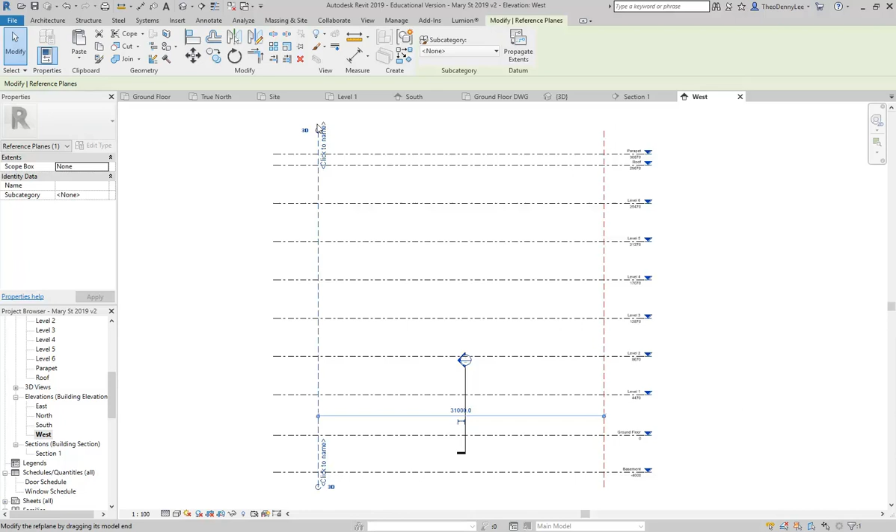So I've got my west elevation still open, just to remind you that I've extended the reference planes to stretch through all of these levels, for a good reason. I'm just going to change one of them so you can see why. So I've brought this one back down, just so you can see. You don't need to do this, I'm just showing you why I made you do it.

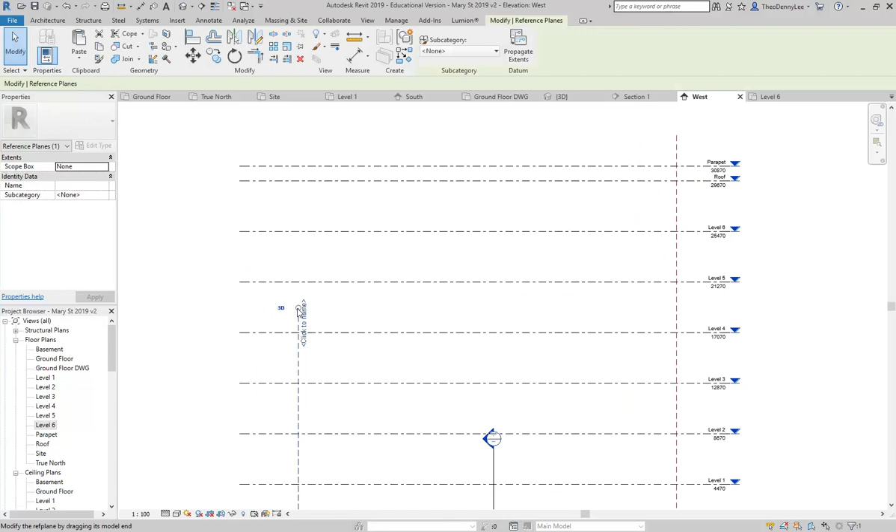So if I go back to one of these upper levels, here you can see this is level 6. I'm going to open up my level 6 floor plan and notice how that reference plane's missing, because it doesn't extend through those levels. So again, if I bring it back to the way I had it, stretched so it crosses over those levels, now if I go to level 6, there it is again.

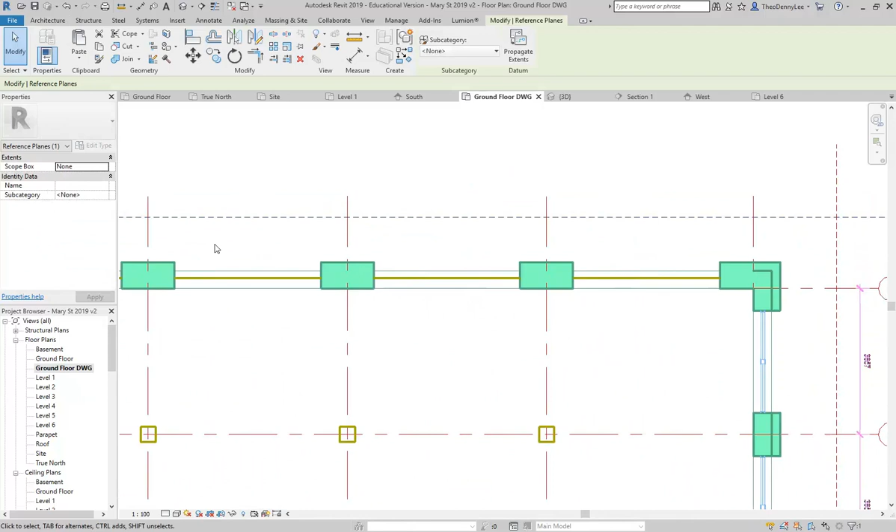So then to make it maybe the right size, now that we know the size of the building because we've inserted the AutoCAD file, you could, if you want to - you don't have to do this, but it's not a bad idea - move that reference plane so it sits on the edge of the AutoCAD lines. Don't be too fussy about the exact position, because you're not really going to use this for your measurements anyway. This is just for a visual reference.

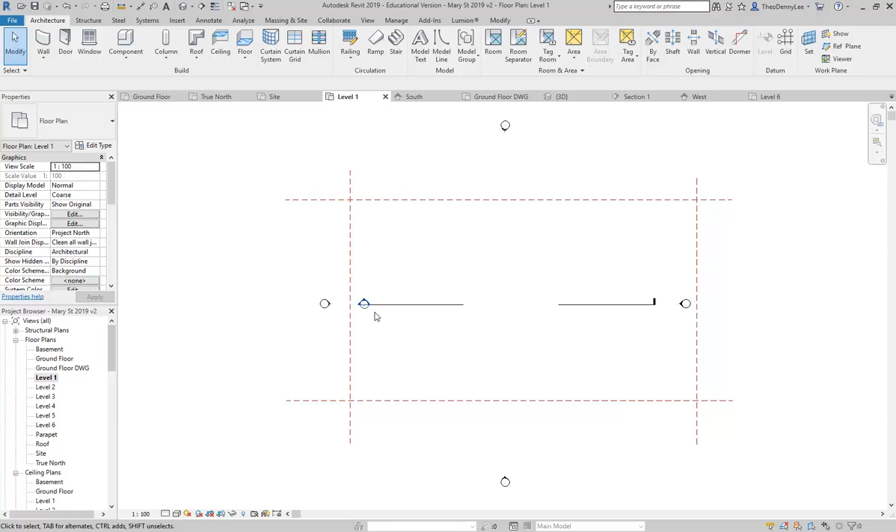Okay, so there we are. And so that way, when I'm looking in the other floor plan views or my elevations, like I was just showing you, I know those reference planes show me roughly how big the building is. As I was saying, it's always a good idea to have those levels go out past the building, especially later when you've got the walls and other things - you don't want the levels sitting over the top.

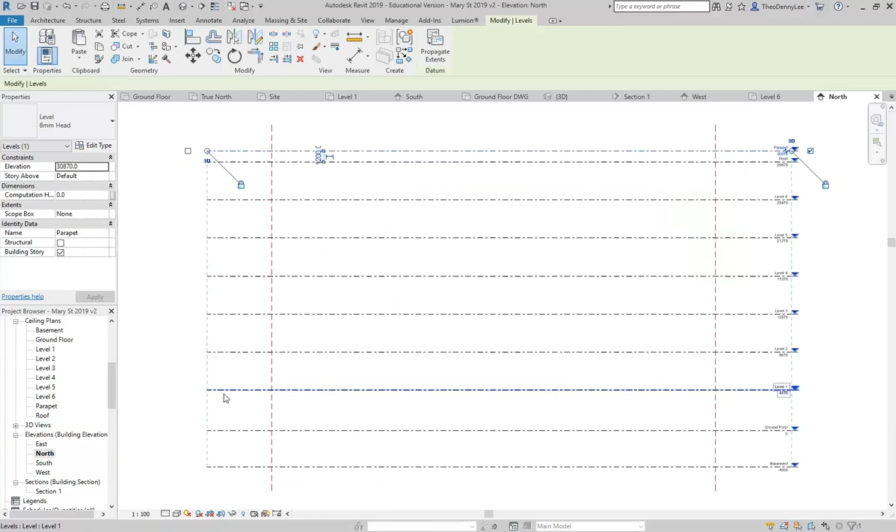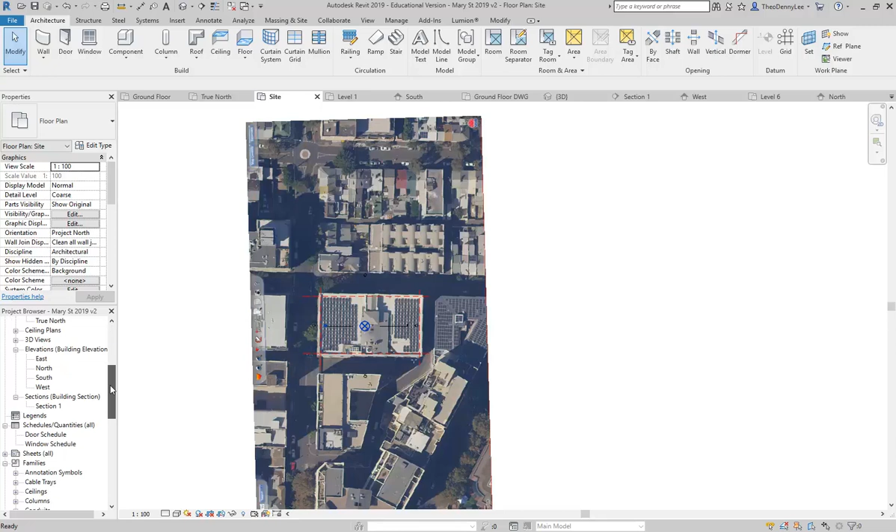So this is all just good setup, and this is actually how I set up almost every single project I work on from the outset. I'll set up the plan dimensions - so we've done that with the floor plan from AutoCAD, but just as important with the satellite image. That tells us how big things are in plan view. But then, equally important, we get our heights using the levels. So those things are often referred to as the constraints for your design. That sets the size of everything, and that's always a good way to start, especially for interior design - how big the interior space is.

And then now I can go back to my floor plan, since I've got the AutoCAD file luckily here - you won't always have that, but we've got it. So I can now use this to draw my main walls. I'm going to use the wall tool, and notice I'm clicking on the top half of that button, which uses the default wall option, which is architectural. If you click on the down arrow, you just have to pick walls architectural. So either click walls architectural or do what I'm going to do - click on the top half of the button above the line, and it chooses that.

So then, as a process to draw walls, this is something you can do every time - check the properties. You need to know what kind of wall you're drawing, and we've got all the different preloaded types. I don't want any of those, I want to make my own. So I'm going to choose one of the generic wall types, doesn't matter which one - Generic 200mm is the one I've chosen. And I'm going to go to edit type.

Exactly, we can put our own wall thickness. Yep, that's right, 470, but notice it's greyed out. So firstly, I need to duplicate it to give it a new name.

Exactly, yeah. So the duplicate lets you give it a new name, but that doesn't change the thickness. So I'm going to call this generic 470mm wall, or even more meaningful, I'm going to say existing 470mm wall. Because that's what it is. The wall's already there, existing. And then where it's got the edit button next to structure, that's where you type in your own thickness, which is where we put in the 470 for the thickness there.

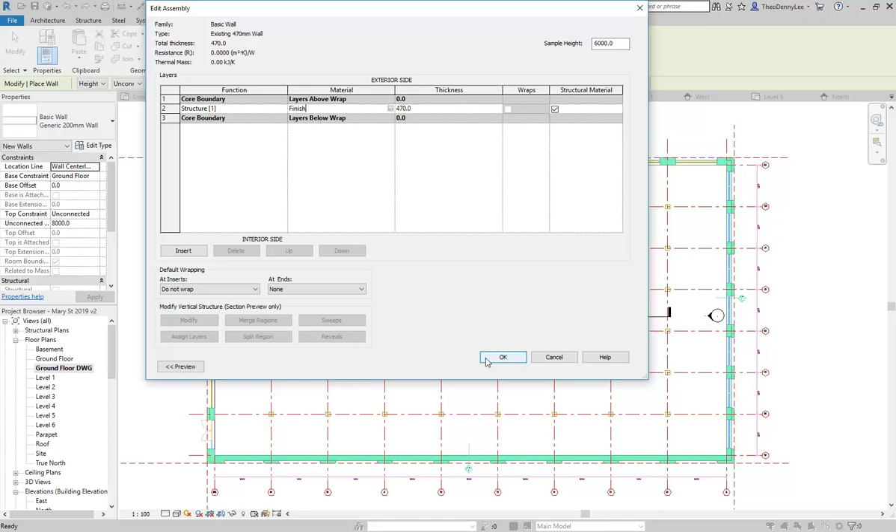And for now, I'm going to leave that finish material, which is just a plain white material, and we'll change it later if we need to. We'll probably make it brick later, but for now I'll leave it on finish. But I'm going to change one thing about the appearance, and that's the coarse scale fill colour. So that's this option here, which a lot of people miss. You've got the colour in the material, but this is just going to change the colour in plan and section.

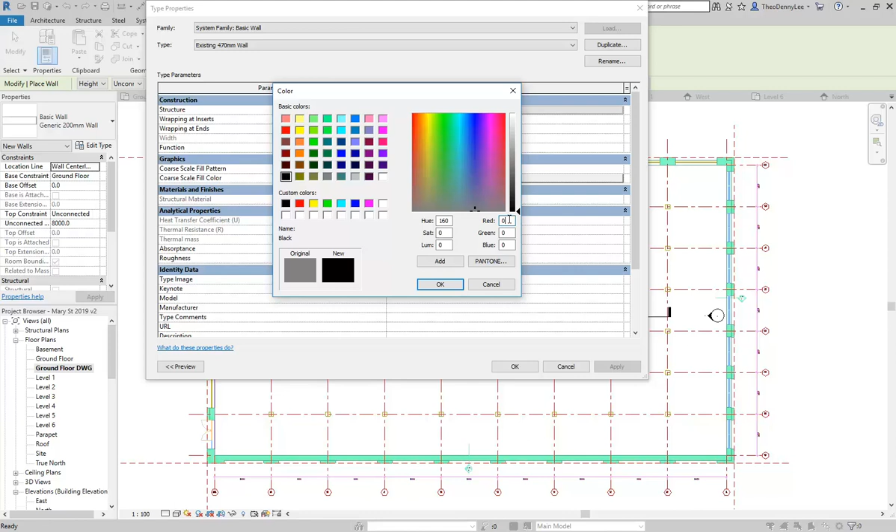So where it says RGB, that's just red, green, blue. 128, 128, 128. Click there, and then you've got the black there, which should be 0, 0, 0, red, green, blue. Yeah, exactly. That's it, that one there. Or just drag this slider to the bottom, and that sets. Exactly, in plan. That's right. When it's cut, essentially, yeah. So that's it, and make sure it says solid fill above that, but that should be there. And then OK.

And then still, before I draw that wall, I'm going to change the height to, well, what do you think the height should be? What's the highest? Shouldn't it be connected to a level? Yeah, it's connected to a level. So which level do you think? Level 1. Well, that's only going to do the next storey. What if you want to go to the top of the building? So we do level Parapet. Or parapet, so we should do the whole wall. Yeah, that's right. So the parapet is the top of the wall. That's what a parapet is.

You actually don't have to put the measurement in, you just put the level in. Exactly. That's right. We've put the measurements into the levels already. So it's spot on. Parapet. So parapet is the top of the wall, right? That's the level that you should have for the wall. So you can always go back and check that that level's there, parapet. And then the location line, I'm actually going to set to finish face interior. Right? Because we've got that with AutoCAD. The AutoCAD drawing gives us the interior measurement. You won't always have that, but we've got it here, so I'm going to use that. Finish face interior. And then we're ready to go.

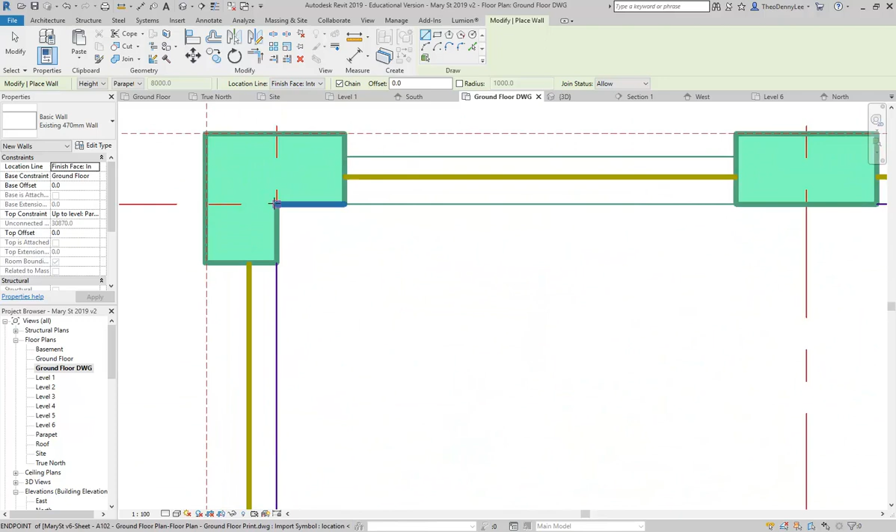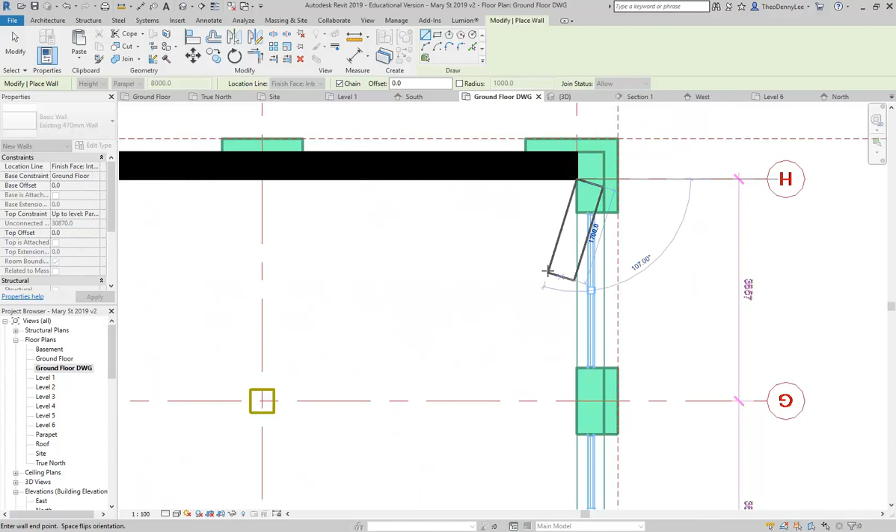So now I can just go around clicking on the inside corner point of the main outside walls. And you can see then that we've got the wall tracing over the right part. That's how it should be. And I'm just going to trace around the four corners, making sure, really important, that I go clockwise. Watch what happens if I go anti-clockwise. Notice the wall goes to the wrong side. So always, if you're not sure, draw clockwise. Okay, so there we are. So notice I get nice black cut patterns in my wall because of that option I set. Okay, and now I can come back to the beginning.

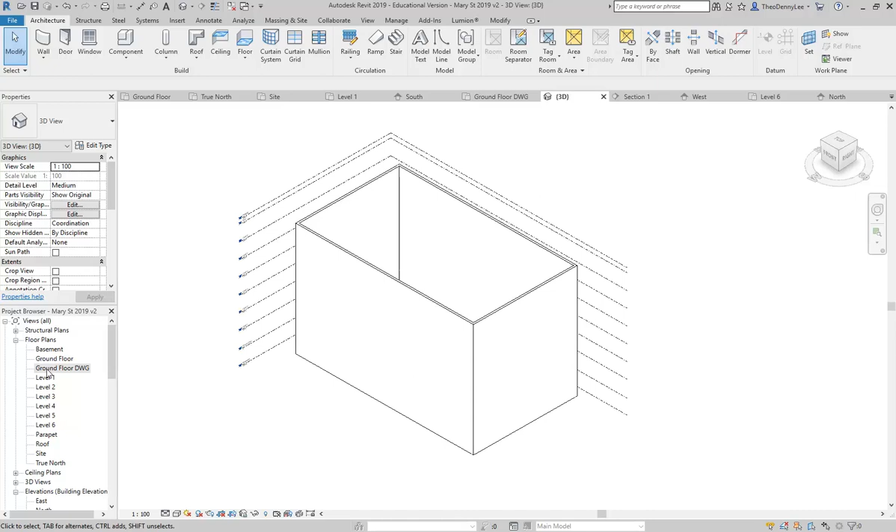Right, and even just with those four main walls, going into the 3D view now, we've got the shell of the building. Nothing special, it's just a big box, but that's a good starting point. And then you'd be amazed how quickly you can get these piers done if you've done them the right way. I've seen people spend days doing this, it just blows my mind when they do it the wrong way.

But if you do it the right way, so I'm doing this too quickly, I'm just going to draw a new wall, and then edit type, duplicate, and this is going to be, exactly, yep, that's good, existing 230mm wall. So what's a 230mm wall? What do you think that's made from?

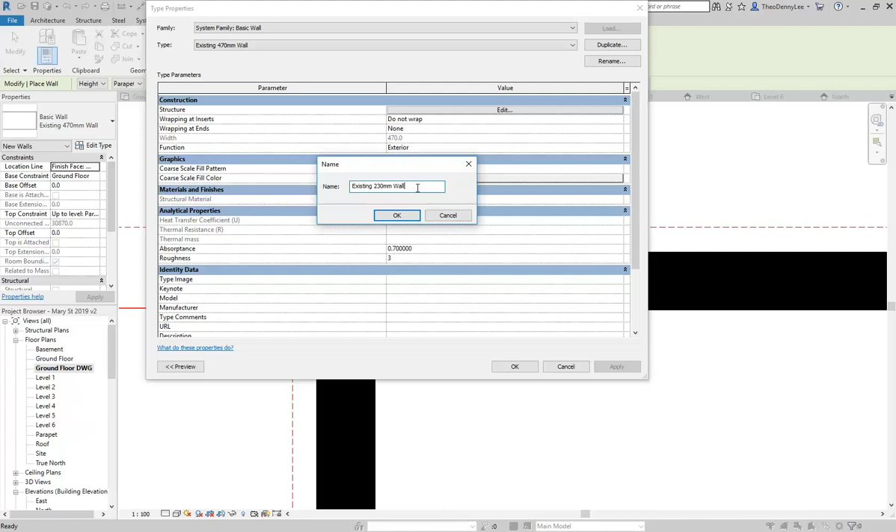Do you recognise those numbers? Exactly, solid brick. So a brick is 110mm thick. So 2 bricks with 10mm of mortar is 230. So that tells solid brickwork, not cavity. And that's exactly what we want, because it's a pier. A pier is just a projecting column, or engaged column.

Okay, so here I've got the same options, the height still on parapet, location line still on finished face interior, and you're super lucky with this AutoCAD file. All you need to do is go around clicking. Now, did I change? I forgot to change the most important thing. The width there is still 470, but it's okay because I've set my new name. I can then just click edit to change that structure to 230.

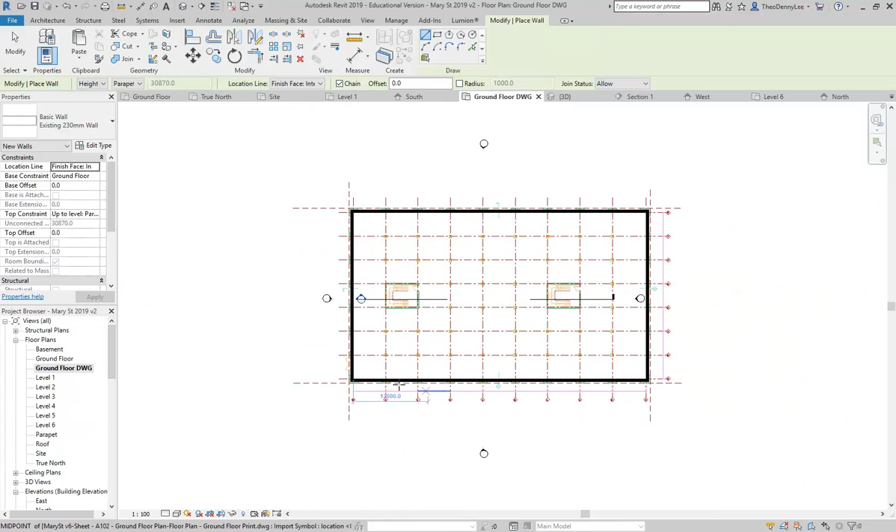Where's your pier? So, there's one on that side. They should all be the same. Yeah, they should all be exactly the same. So you've got to draw the whole length of the wall first, then draw just the piers. Yeah, no, like this. See how I've got the whole wall, all four, the main walls. That means one of the walls has the extra one. All of them have the piers.

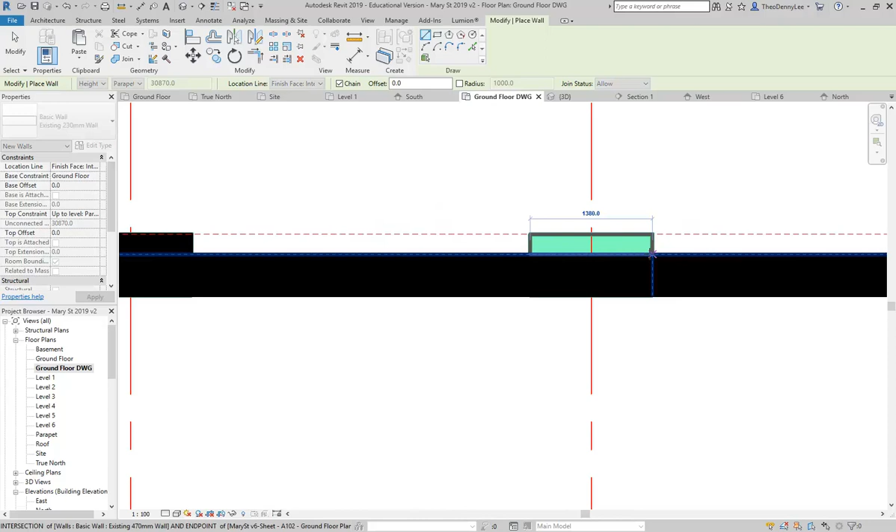So then now, the way you draw the piers is just over the parts that project. So just like that. How big are they? 230. Same as the other one. Yep. Okay, so notice I've cancelled in between each one, and I'm just going to go over. Right, so I go over these, escape, and then go over the next one, escape, and just panning across. You can copy them if you know how to copy them, but it doesn't hurt to just draw each one. It won't take you that long.

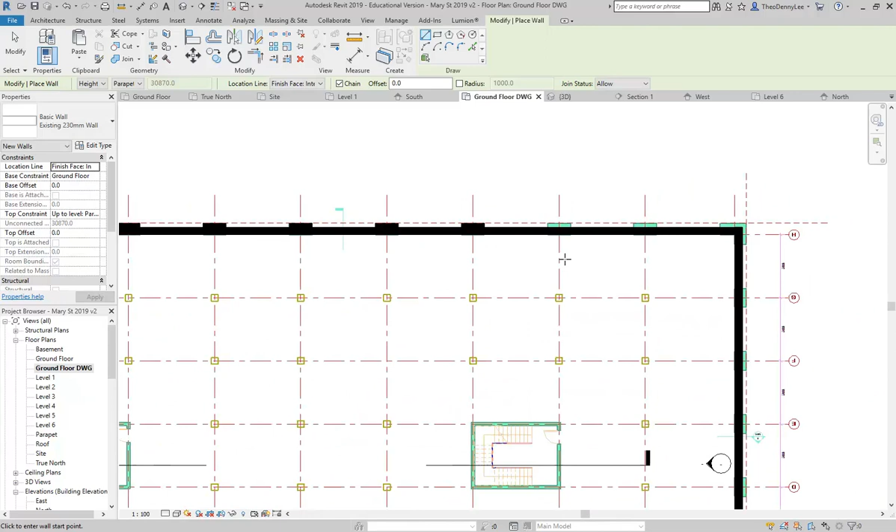Right, that's right, the curtain walls will go in between these piers. Right, so these are pretty standard shop fronts. Can you just zoom out a second? Yep, sure. I'm just going around each one. No, I mean on the other wall. Which wall? Yeah, well, it's a bit confusing when you're looking. You're just doing the whole

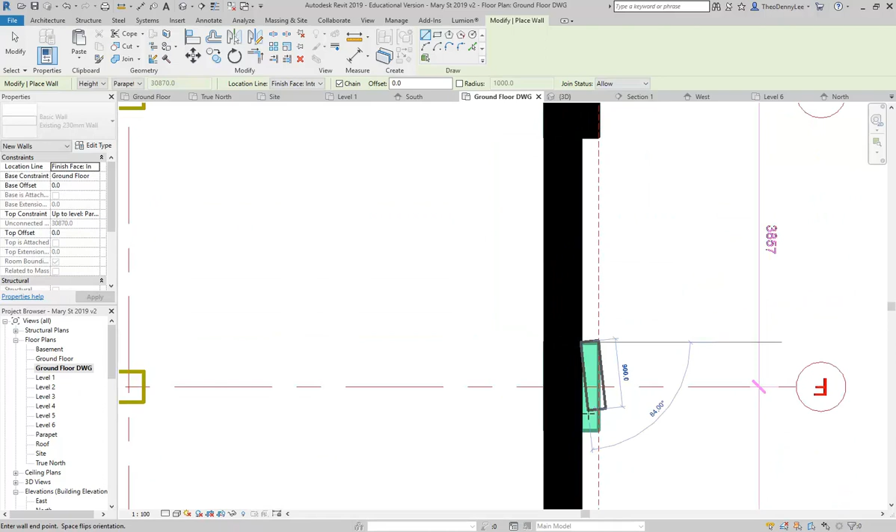Yeah, the windows come in afterwards, that's right. And the window's going to make it look pretty different, so that's why it's good to do this part first. You're going to do now. Yeah, but how do we know where the window is? They fit exactly in between. Yeah. And I've made the window the right size. When I give you the window family, it's already the right size to fit in between.

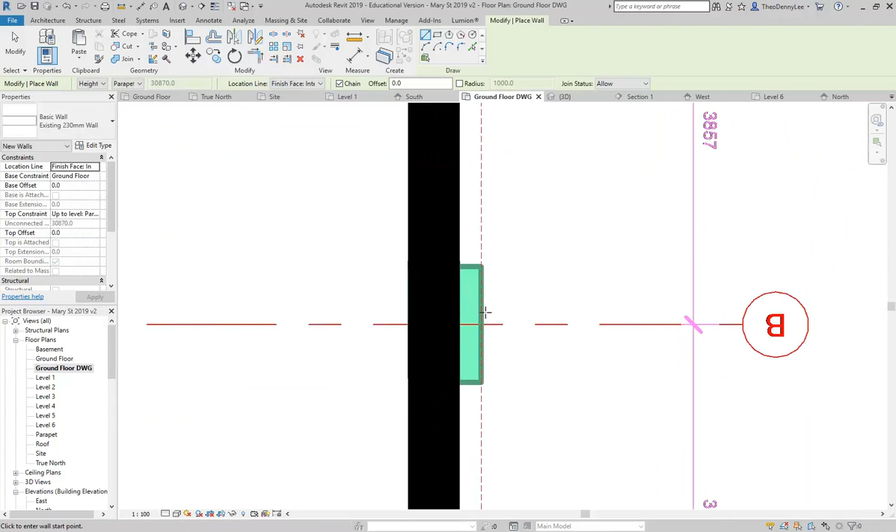Right, so you just do it like this. You just draw each pier following the AutoCAD lines. So normally you wouldn't get these measurements like this. You'd have to go and measure them yourself. But here you've been given it, which saves you a lot of time. Yes, exactly. That's right. And it's good practice just drawing walls once you get that part done.

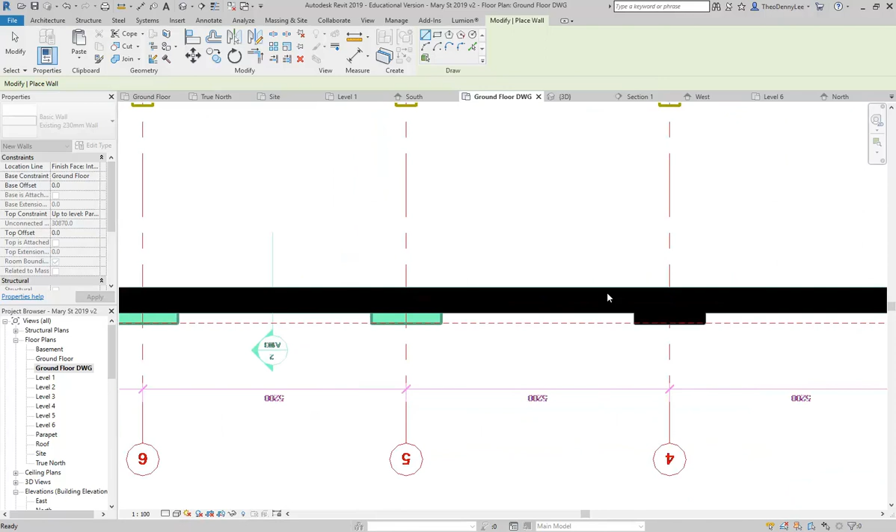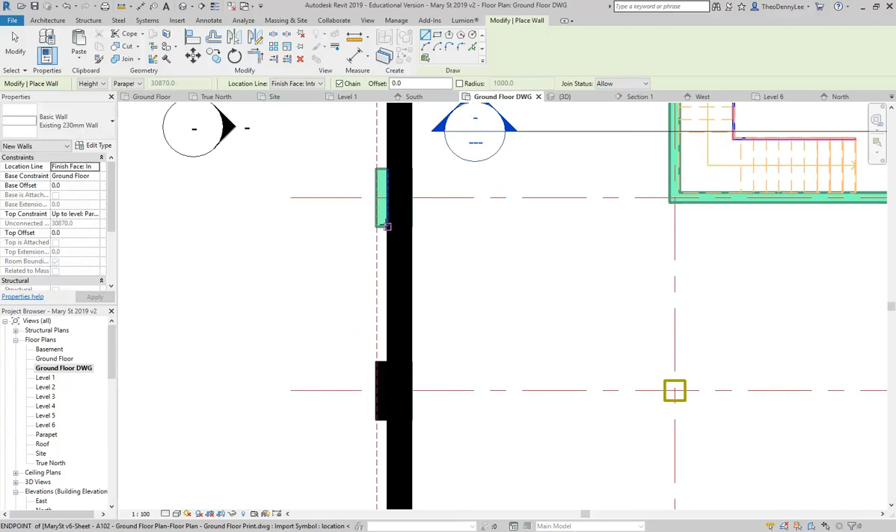And you might know once you've drawn one side, there are ways of mirroring the whole lot to the other side if you want to try that. But again, it doesn't take that long just to draw every single pier like I am here by clicking the 2 points and escape in between each one. And then 3 points for the corners. 1, 2, 3. And yeah, it shouldn't take you that long. It's actually a pretty regular building for this era. It's very modular, which is nice.

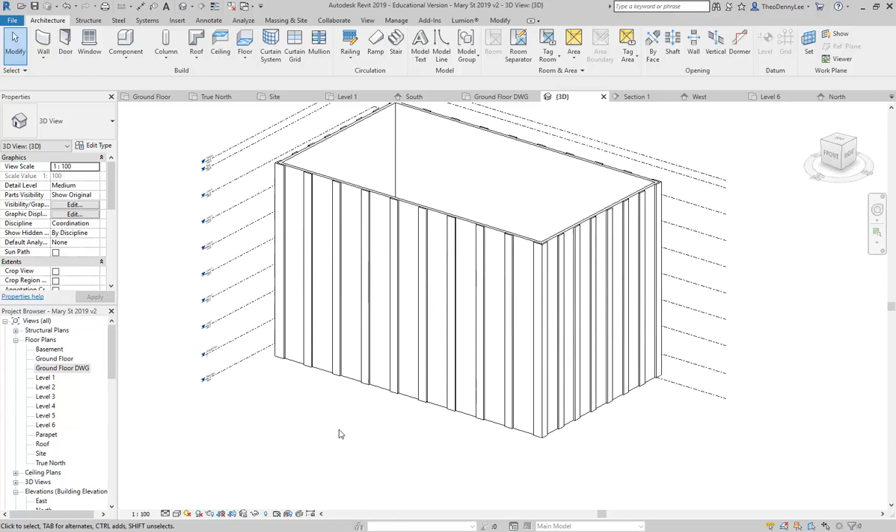Right, so nearly done. There we are. So that's the basic shell. Now if I go back to the 3D view, you can already see the pattern of the building. Sort of. So I'll give you a bit of time to try that, and then I'll give you a little talk about curtain walls, and we can also look at putting the windows in.